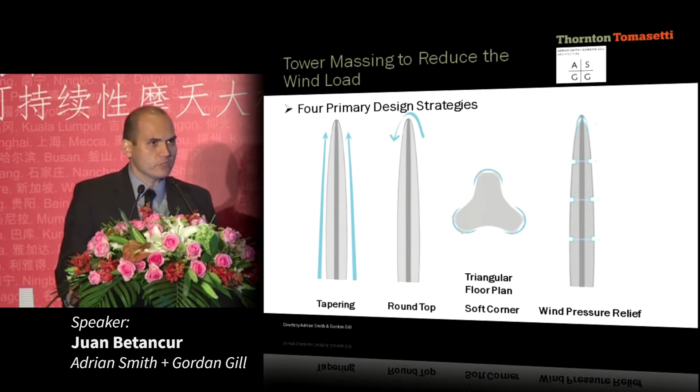But what we wanted to do is bring that further into the building and find out how we can introduce more openings, work with the shape of the building to get the architecture, the structure, and the mechanical systems to all work together and help optimize the systems.

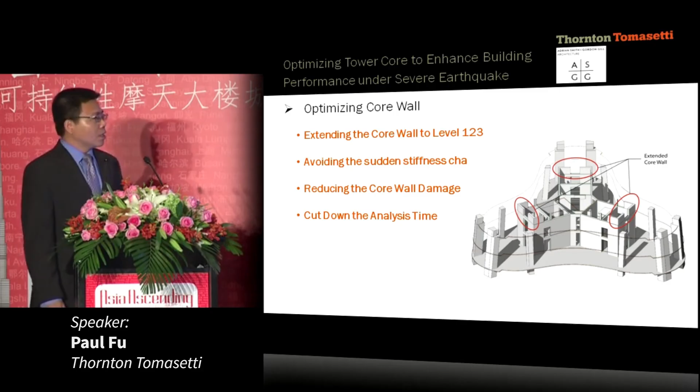This kind of building has a very special curtain wall system. So we will ask help from our in-house structural engineer to solve how to simplify the curtain wall. So I will ask help from Mark Dannettel. He will present how to simplify this curtain wall system.

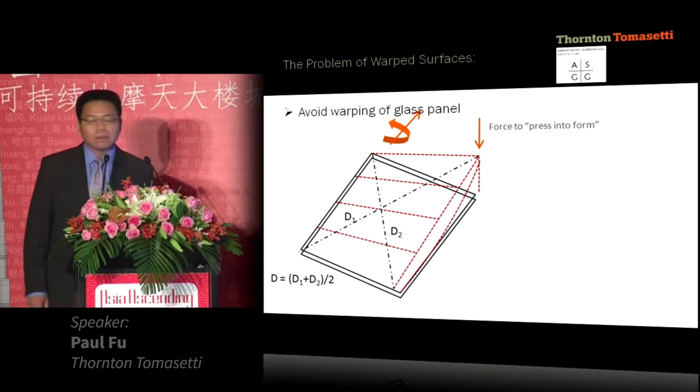So everyone here knows Dennis Poon. So everyone here knows that Thornton Tomasetti is a structural engineering firm. But what you may not know is we also have a building skin practice where we act as a facade consultant for the project. So in this case, it was very convenient for Juan to give us a call because, as you saw earlier when they were doing the wind tunnel tests, the building developed as a tapered form.

And the tapered form develops warped surfaces which are no longer flat or planar. And the only way to do planar glass with that would be to do triangles, and most of us don't want to do triangular glass. So the problem of warped glass or warped curtain wall panels is that there are edge seals which tend to suffer damage when they are permanently warped into some position from a flat position.

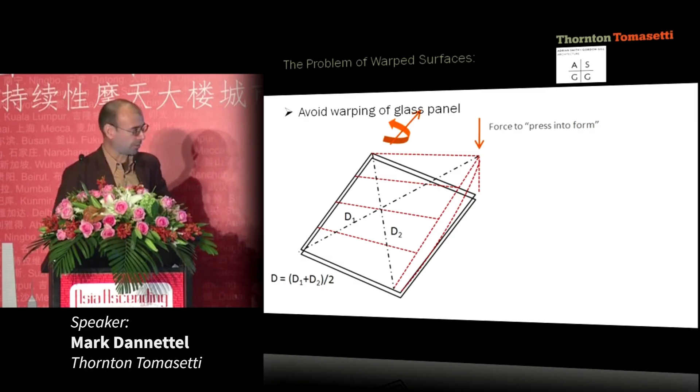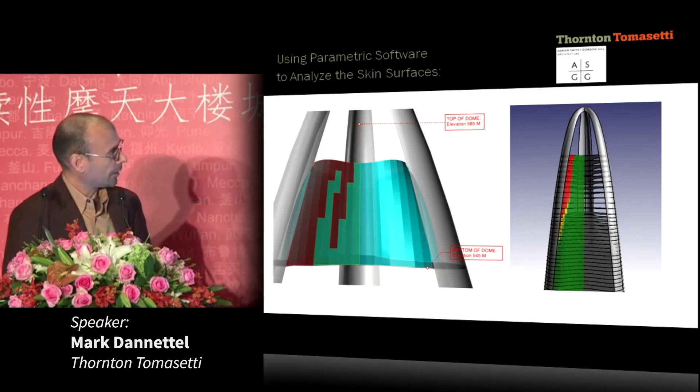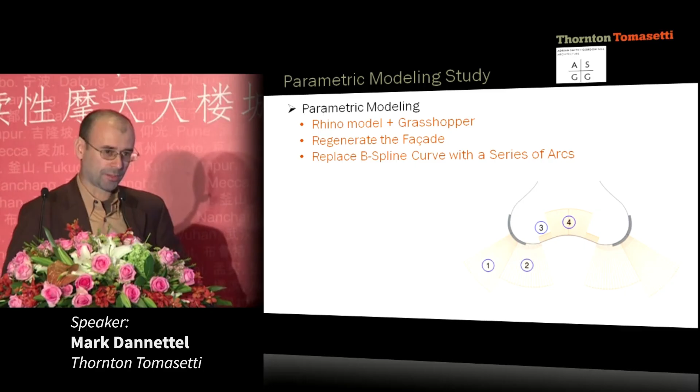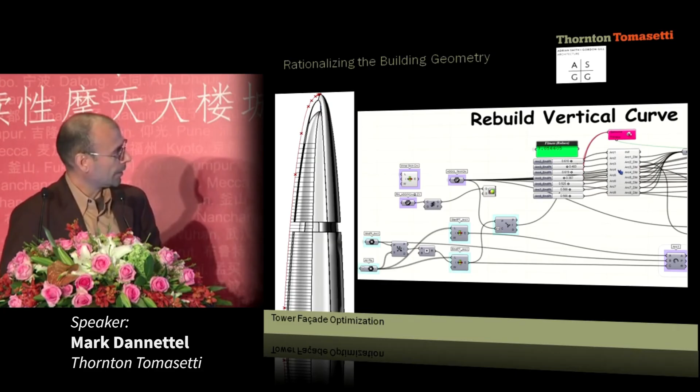And as we took the analysis forward, though, even with the clean geometries, from a constructability standpoint, we found that the warpage was still very excessive at the upper portions of the tower. So ultimately, we recommended rebuilding the skin by stepping back at each floor. So there's a slight step back and there's a misalignment from one floor to the next. And we developed everything with conical forms.

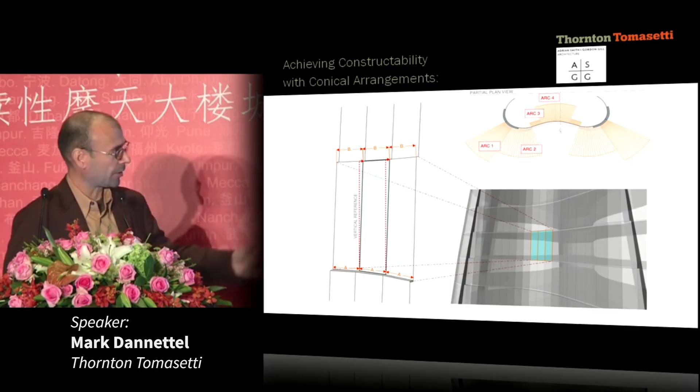So actually on each floor, the glazing leans back towards the core, but then at each floor level it steps back in varying amounts, which allows for the differential warpage to occur. And then basically we used Grasshopper to reiterate and rebuild the entire form. And over on the right, you can see that each floor is stepping back ever so slightly, but those step backs vary along the entire perimeter of the floor.

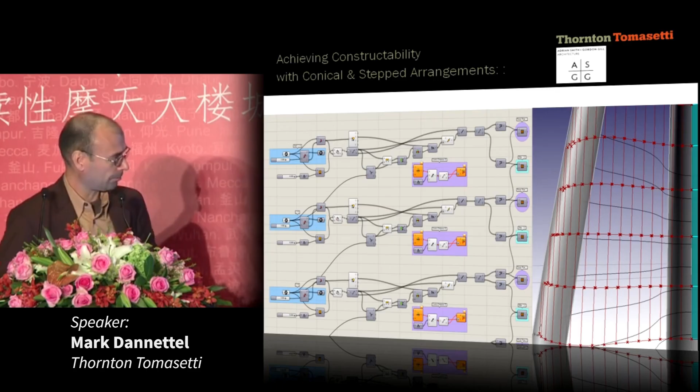All right, so for this presentation, we emphasize that with seamless coordination between the architect, the structural engineer, and also the facade engineer, we can optimize the architecture, the structure, and also other disciplines. Second, the special architectural feature can help the structural engineer achieve structural efficiency. And the last one, the structural optimization can add special character to this architectural feature as well. So, thank you.